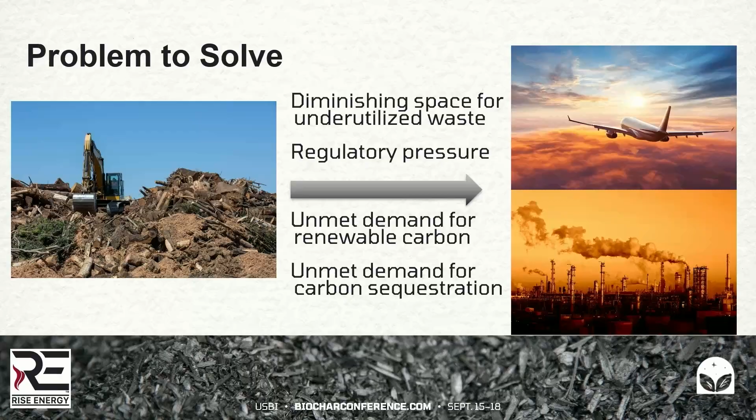At Rise Energy, we're really focused on becoming exceptional stewards of those resources, where we take the feedstock, the aggregate, the biomass, and convert that into intermediate products that can then be used as building blocks for higher value eventual end use products, whether that's fuels or chemicals, et cetera.

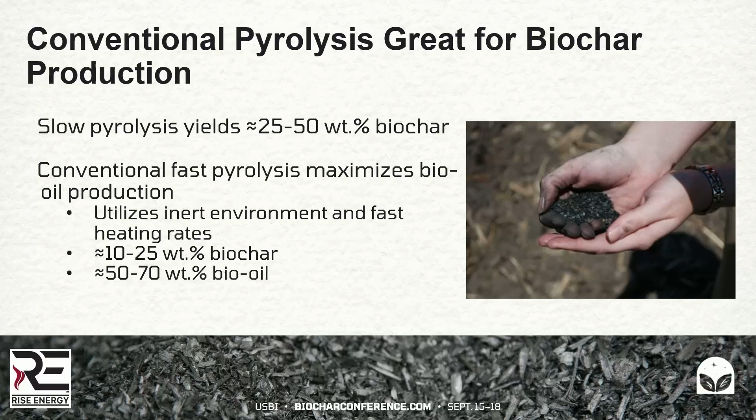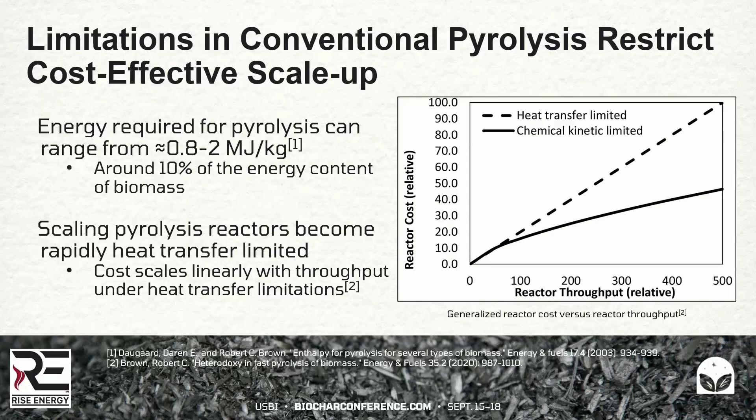You get really high costs just because you're restricted on getting the heat and getting that energy for pyrolysis. Conversely, if you can scale due to just chemical reaction limitations, that scales at a factor of about 2/3. So it scales lower, allowing you to have a lower reactor and thus lower capital cost for your overall plant.

So our technology, this autothermal pyrolysis, comes in and really allows us to overcome some of these barriers. What we do is we take biomass and we do not shy away from the term air or oxygen into our system. That's really the core of it. That's kind of taboo in the pyrolysis field. But what we really want to do is consume some of that biomass internally to provide the energy needed to hit the pyrolysis reactions and overall yields.

So by doing that, we introduce air through our system, and this operates at equivalence ratios of around 10%. Gasification technologies run roughly 20 to 40% equivalence ratios, and combustion is at 100% or over in terms of excess air. So we're really limiting the oxygen, but we're using it as a catalyst or a tool for our technology to become very energy efficient.

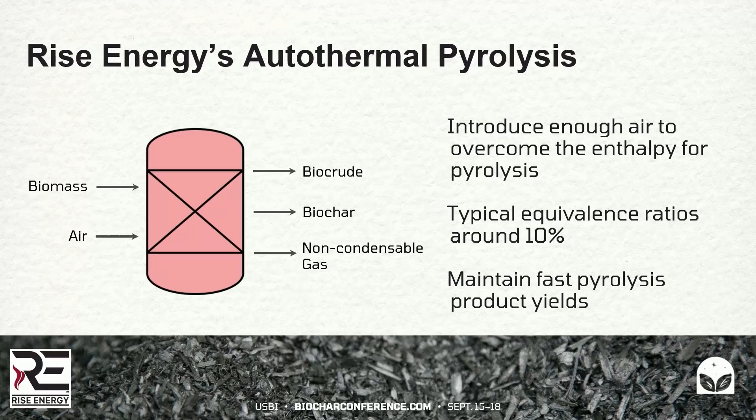Not only do we do this, we are not consuming desirable products. We still maintain the overall fast pyrolysis yields. In fact, you can't get a truer definition for fast pyrolysis than through autothermal technology, because of our introduction of air and the consumption, we are having internal heat transfer. So we remove that heat transfer, but you've also got the fastest heating rates possible to get you the highest quality bio oil. This autothermal pyrolysis removes those heat transfer limitations.

By transitioning your gas media to use oxygen and air, we eliminate the heat transfer limitation in the exact same reactor. We actually put 3 to 5 times as much throughput through the system, while still maintaining the overall rough percentages of product yields.

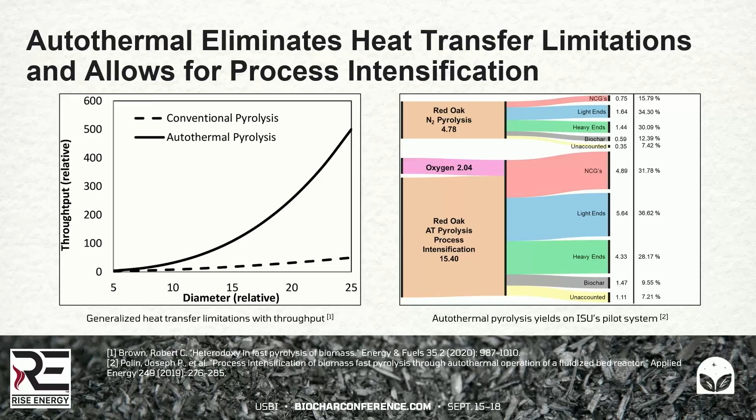So this autothermal technology really unlocks huge commercial benefits. First, it lowers the capital costs by 25%. With conventional pyrolysis, where you're required to have only a nitrogen atmosphere, you need capital associated with that, whether liquid nitrogen tanks, etc., so that you have that media. All we need is an air compressor to get air to our system. We remove high capital intensive stuff on the front end, which overall reduces the capital cost.

Because of that process intensification, we're able to build smaller while still harnessing more feedstock in the local aggregates. The third aspect is it eliminates the need for fossil energy. A lot of companies use natural gas to provide heat, using external heating to get the energy required for pyrolysis. Because of our autothermal technology, we're generating that ourselves. This allows us to reduce the carbon intensity of our overall process. We're strictly just burning biogenic carbon, so there's not an increase in net emissions from that aspect.

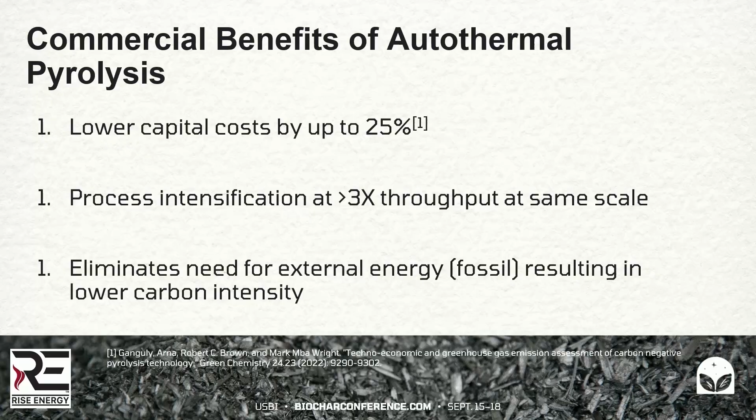Now, I mentioned the Iowa State Pyrolyzer. That's something we've been working on for the past 10, 15 years. That's at 0.5 tons per day at Iowa State University. Jordan is also here on behalf of Iowa State University.

Iowa State partnered with Harry Stine from Stine Seed and actually built the first commercial autothermal pyrolyzer, which is operating at 50 tons per day. It's operated at capacity continuously using agricultural residues. Corn stover has been the main feedstock for this particular system. You'll see it there on the right, kind of set up in modular skids, which I'll get to in a bit.

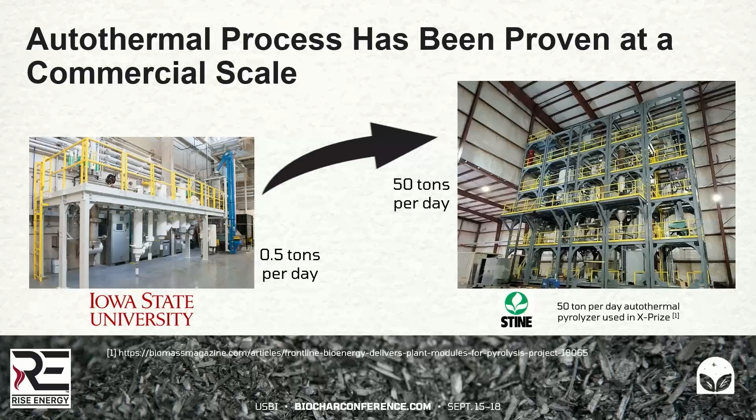At the lunch keynote we heard yesterday, there were a lot of Iowa representatives who toured some facilities and became big proponents of biochar and the pathway for it in our economy. Well, spoiler alert, there's a picture of the actual system that did the convincing. So the short summary is the autothermal process has already been proven at the commercial scale. Rise Energy is looking to take that to the next step.

We also heard in the first talk this morning about fractional recovery - how can we really get the optimal value of that bio liquid, that bio oil? So Iowa State developed and patented the fractionation technology we alluded to, using a series of quenches, condensers, and electrostatic precipitators to try to capture all of your potential bio oil. The big advantage of this is you're able to separate it into different desired cuts, kind of like a reverse distillation process.

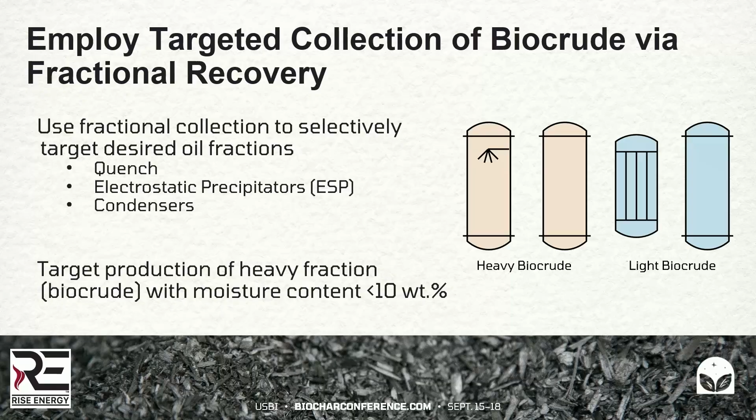We talked about wood vinegar, the pyroligneous acid - very light compounds of the bio oil, often mixed with a high concentration of water. That's represented in the blue schematic, collected at lower temperatures. Rise Energy is really more focused on the heavy biocrude, which I'll get into - the real viscous material, the very energy dense material. By separating through this fractionation, you can selectively choose what compounds to condense out of your vapor stream. With that heavy crude, you're able to get a moisture content less than 10%, really eliminating some of that oxygen, which is undesirable for potential upgrading opportunities.

So we ran some pine on our system, dry pine. The picture on the left is our actual heavy biocrude cut from that first half, and that yields about 30 weight percent of your feedstock that goes through. So roughly a third of your feedstock you can get into this high quality biocrude, which is less than 10% moisture content, very high in carbon content - you can see roughly 60 weight percent.

Now, because we're at a biochar conference, I have to do some due diligence and do a biochar slide, so you get half a slide focused on the biochar. Out of this process we still yield about 15 weight percent biochar, but it's very high quality biochar - 70 weight percent fixed carbon, roughly 80% carbon content itself, and hydrogen content is 3.5. Iowa State has done some studies on the recalcitrance of this, the non-labile portion of that biochar, and from everything we've seen, our biochar from autothermal pyrolysis is roughly 90% recalcitrant, so it's not going to biologically or microbially degrade along with the thermal degradation.

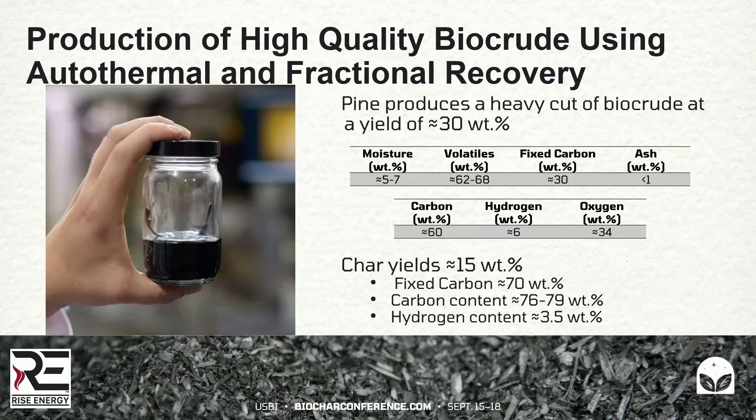So a very high quality biocrude - that's really our focus from the fractionation technology. Now the question is, what can we do with this biocrude? We heard from the first talk here you could pump it down oil injection wells, or burn it for CO2 sequestration. We look at it as having many more potential opportunities. I want to highlight we call it a biocrude because we truly see it as a crude substitute to petroleum - it's very viscous, it looks like crude petroleum.

Downsides - it's got a little bit of oxygen, so you've got some unstable reactive characteristics that we heard of that you've got to handle. One way Rise Energy is handling this is through a stabilization process, where we take that raw biocrude, that heavy cut, and introduce it with hydrogen in the presence of a solvent and catalyst. At low temperatures and low pressure, we call this hydrogenation - we convert some of those unstable reactive groups into stabilized portions. So we convert carbonyl groups to alcohols, and saturated vinyl groups to aliphatic groups. What this really does is dramatically reduce the viscosity of that oil - that picture I showed and was holding is viscous at room temperature.

I can put it upside down, it's not going to drip down. Take that same cut, do this low pressure, low temperature stabilization process, it becomes non-viscous. It acts with less viscosity than actual maple syrup at room temperature and even refrigerated. So it flows—I've got a jar of that on my desk.

It's stabilized, so it's not going to oligomerize over time, which is very common in pyrolysis and one big barrier in commercial applications. So our stabilization removes that aspect of it. This allows us to transport it efficiently, effectively, and maintain its high quality for future upgrading technologies.

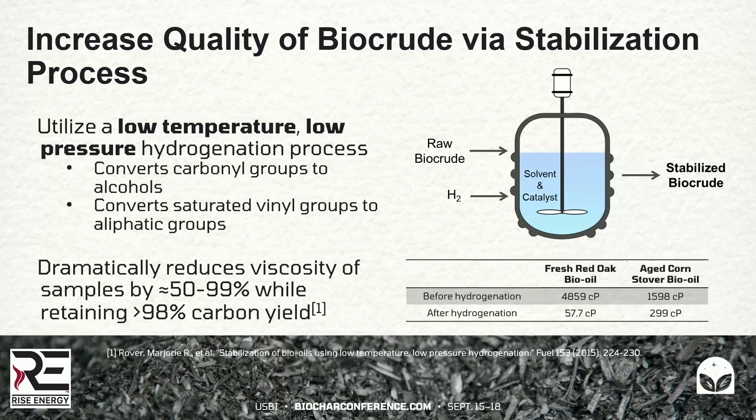Another aspect, depending on what feedstock you're putting into the system—if you have a feedstock that's high in cellulose content, high in potential sugars, glucose, xylose-type fractions—there's potential interest to extract the sugar fraction out of your bio-oil. So we have a liquid-liquid extraction technique where you take the biocrude, that heavy stuff that comes out of the system, mix it with water, and you get a water-soluble content where your sugars are retained. You can see on the right a picture of pyrolytic sugar syrup.

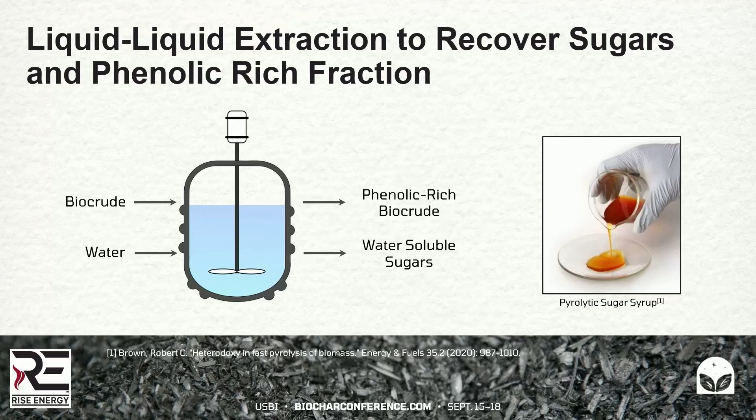And then you get a phenolic-rich fraction, which has a lot of the phenolic oligomer stuff coming out of the lignin portion of the feedstock. So through this separation, you're able to get two different kinds of product pathways.

From the sugar portion, Iowa State has done a lot of work looking at making purified sugars out of this. You can take that pyrolytic syrup, run it across industry-based resin technologies to produce high-quality, crystalline-based sugars. A couple years back we did a TEA out of Iowa State where you produce pure levoglucosan, and just on the economics to break even on the overall pyrolysis process, you could produce levoglucosan at over $1,000 per metric ton—over 1/10 of the current selling price of levoglucosan.

So the point there is you're able to produce high-quality potential chemicals and other compounds coming out of the sugar fraction. There's a lot of interest in sugars for upgrading to alcohol-to-jet, right? So depending on your feedstock, you could get potentially 20% of your overall feedstock coming out as this sugar fraction.

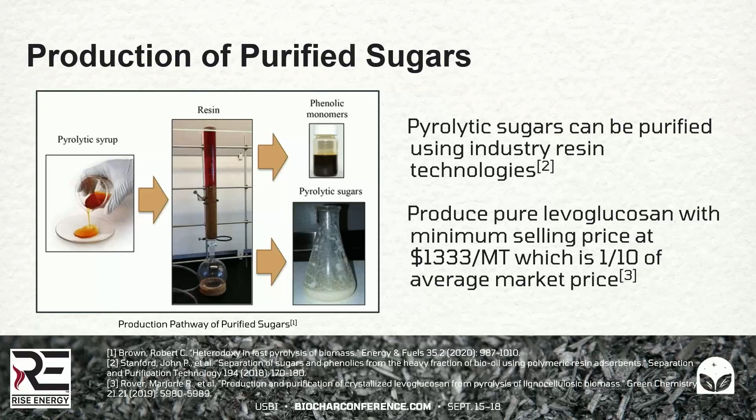And then the other question is, what do you do with that phenolic-rich fraction, or if there's not a lot of sugars in there, just the original biocrude? Rise Energy sees the long-term pathway to that—not tomorrow, but long-term—as the production of renewable fuels. So Iowa State partnered with Pacific Northwest National Laboratory and successfully hydrotreated this biocrude fraction, this phenolic-rich viscous biocrude, into renewable fuels.

So fuels that are indistinguishable from petroleum—you can set them side by side. Approximately 40 to 50% of the fuels were in the gasoline range, while another 45% was in the diesel range. So about a barrel of that biocrude coming in can produce roughly a barrel of actual fuels coming out.

Iowa State is still very much interested in this pathway, obviously. We're currently working on a USDA grant with a top 5 petroleum refiner to actually upgrade this through a pilot hydrotreating system that's representative of one of their biorefineries. At Rise Energy, we estimate there's a potential of approximately 150 liters of fuel per ton of feedstock.

This is important because, as I mentioned, there's unmet demand for some renewable fuel volume obligations. This pathway would give you access to unlock some of the D3 and D7 RINs that aren't currently being tapped, so you get high value for that biocrude.

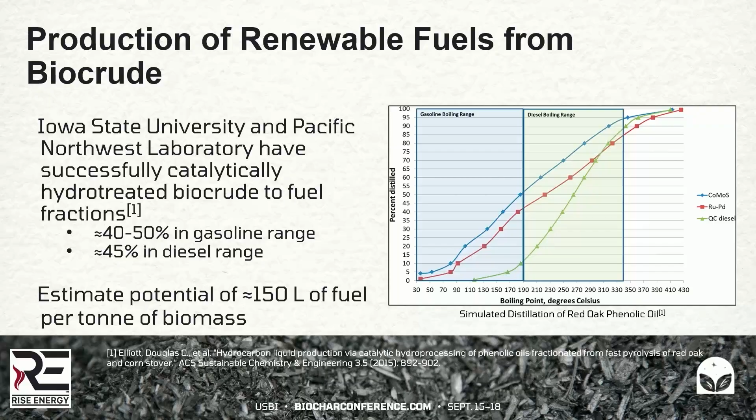Now another option for the biocrude is to use it to make bioasphalt. This is something Iowa State worked on with a lab there. We're producing performance-grade bioasphalt, where you take that phenolic-rich portion and blend it with ground tire rubber. We achieved a performance-grade asphalt of 58-28. The 58 represents the temperature in Celsius at the higher limit that asphalt can be at, so 58 C, and the lower limit is negative 28 degrees C.

This was actually paved on a bike path in Des Moines, Iowa. The Waveland Bike Trail was paved with this bioasphalt produced out of the pilot-scale reactor from Iowa State University. It's been very successful so far—still investigating potential partners and future opportunities with this bioasphalt, mainly because it's a promising and less hazardous substitute to bitumen.

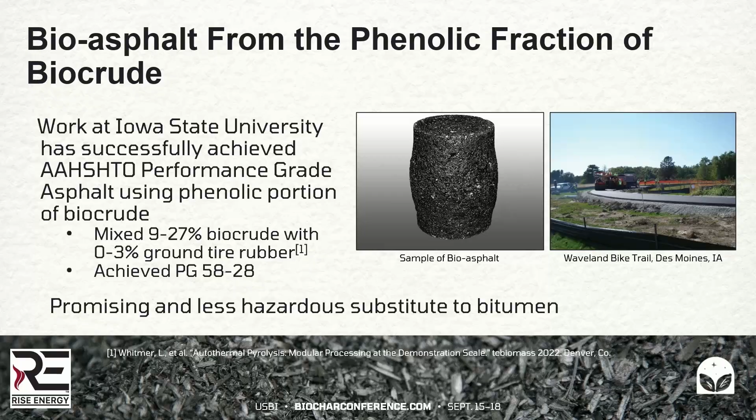The last aspect I want to talk about is the modularity we're focusing on. We believe in harnessing economies of mass production as opposed to economies of scale. Economies of scale means as you build bigger, you actually decrease the overall capital costs.

However, because you're building very few of them, capital projects are very intensive, so harnessing the actual cost savings takes a long time. But with modularity, you can harness the Wright's airplane model, where you learn more by producing more of the exact same equipment. A learning rate of 20%, which is industry standard, means for every doubling of throughput capacity, you reduce your capital costs by 20%.

Roughly, in some of our calculations, by the time you hit the 20th or 30th system, you hit what's typically called the nth cost from your capital aspect. So this really allows you to save on capital intensive projects.

Because of Rise Energy's autothermal technology, you're able to get a lot of throughput from a very tiny reactor. We're able to build modular. So the picture I showed earlier of the Stein system, it's a 50 ton per day plant, but it's built in modular components, so you're putting them together like a Lego brick.

This is not to be confused with mobile, as we heard in the first talk. This is production modular, so it's mass produced at an EPC and construction firm, then shipped to wherever your plant would be. This has been successfully demonstrated at that 50 tons per day scale.

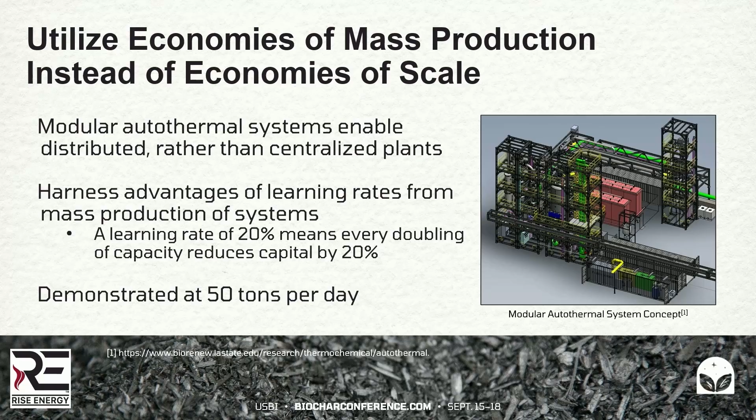All of that has been combined - Iowa State University published a techno-economic analysis at what is believed to be the sweet spot for this kind of technology, at 250 tons per day. Some of the assumptions that went into this TEA analysis are not only from harnessing the sugar fraction...

...but getting a value of about $500 per metric ton of phenolic-rich biocrude. The assumptions also included $80 per metric ton of biochar, which I think at this conference is relatively low, so that allows you to lower your value for the biocrude. We think the biochar can be anywhere over $300 per metric ton, depending on potential applications.

Rise Energy's internal analysis suggests you can be profitable at smaller scales in the current carbon markets than this 250 tons per day.

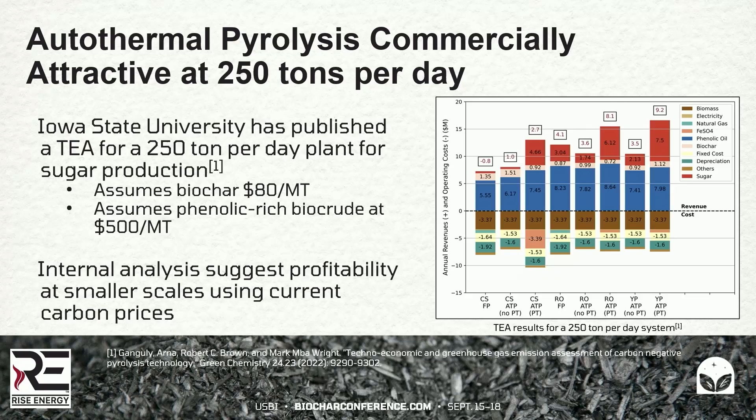Transitioning, Rise Energy is poised to become the industry leader in the domestic production of this biocrude, specifically the stabilized biocrude. Our long-term vision is to have dedicated lines to a biorefinery. We recognize that's not happening tomorrow - industry's not ready for it. We're able to produce biocrude that's ready for it, but the industry isn't there.

So we're harnessing other opportunities, discovering aspects like bioasphalt. The stabilized biocrude can also be used as a marine sulfur fuel for shipping, or for generator potential - really using short-term energy resilience, and also capturing value on the biochar. We see optimal commercial ranges anywhere between 50 to 300 tons per day of feedstock input for a Rise Energy plant.

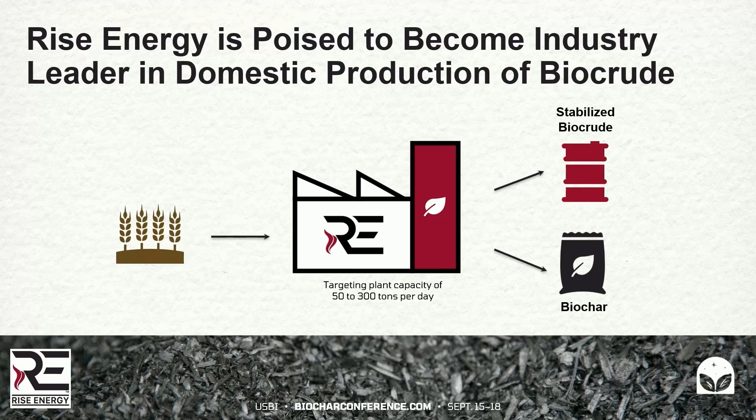So I mentioned we started out of Iowa State University. We were actually founded in 2022. We've gone through various accelerators out of MIT and in Iowa. In the early conception, our research group, Dr. Brown's research group, the Bioeconomy Institute at Iowa State University, was one of the top 12 milestone winners for the X Prize - one of 12 out of 1,200 applicants, though Rise Energy wasn't formed at that time.

We came in later and partnered with Harry Stein, the Stein system, and Iowa State University, and we're therefore officially a top 100 finalist in the X Prize for carbon removal.

We've been working with strategic potential partners, doing feasibility studies and aspects like that, while still at the university. Right now we're targeting to officially jump off from the university, get those handcuffs off if you will, and really get our first commercial system built, in the ground, and operational by 2027.

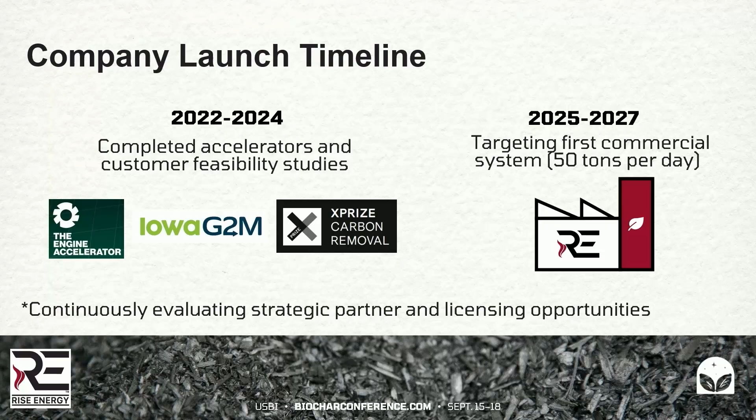So the purpose of being at this conference is the first public introduction to Rise Energy, but also evaluating strategic partnerships, able to license our technology, so happy to talk about that. We're also in the fundraising aspect to get this commercial plant built, so looking forward to that and to learning more about securing carbon credits from the carbon market. With that, I'd like to thank you and field any questions.